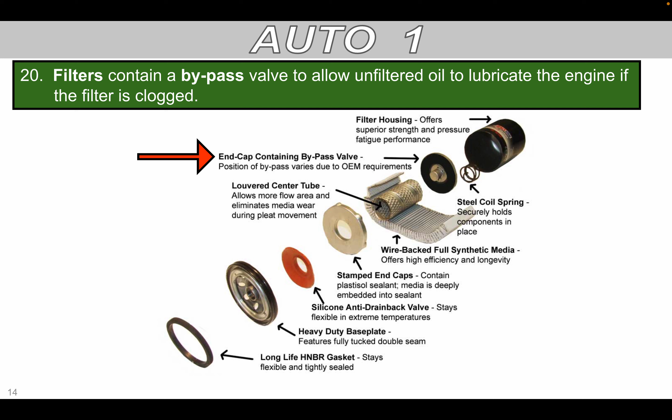So what they might actually end up recommending is bypass surgery. It's the same concept — they're going to go in and take a tube to bypass that area that's clogged up in your arteries so that the blood can more easily flow in your system. My grandfather had quadruple bypass surgery back in the day, and it improved his health because his blood was able to flow better. Same idea with this. So in the event the filter is clogged, this opens up, and unfiltered oil is going to then lubricate our engine. Not ideal, but better than our engine blowing up.

Here again is kind of an image of what this looks like from a cross-section. So here's my oil filter, it's like all in here. Oil's coming in from the oil pump under normal circumstances, and then it's being forced through this paper media. It comes down here, flows down here as well, and forces it over here as well. That paper media is picking up all that dirt and debris, and then it's basically going up and then out into the oil galleries to where then it's circulated throughout the engine. Okay? Real simple concept.

Unfortunately, if this paper media gets too clogged, oil can't get pushed through there. So what ends up happening is down here is my bypass valve. The oil pressure builds up so high that it can actually push on this and open this little button up, and then literally unfiltered oil can go this route out into the engine. So that's kind of fun.

During our oil lab out in the shop, you're going to change oil. Drop the filter, put the filter on, take the oil out, put new oil in. Awesome.

Your group is going to get an old oil filter that we've taken off an actual vehicle that we've changed oil for, like a teacher's car or something. We're actually going to open it up and take it apart. Most people have never done that before. You're going to pull out these elements, pull out the paper filter, pull out the bypass valve and all this sort of stuff and kind of see this. Do we have to put them together? No, we're just pulling it apart and doing kind of an inspection on it.

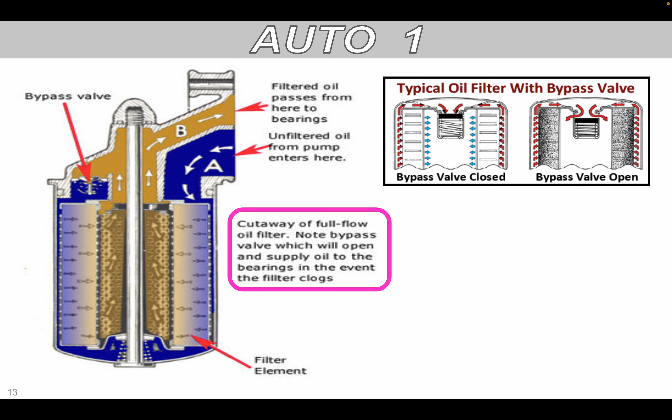What does it mean by swollen? You ever take a balloon and blow up the balloon, you add air to it? What happens to the balloon? It blows up. It's swelling, becoming swollen. So imagine that same concept. I got my oil filter, I'm taking it off for an oil change. I notice that it's kind of blown up a little bit bigger, like a balloon.

Alright, let me get first hour. Okay. Francisco, there we go, thank you. Also, I don't know why you're staring down. Probably because you're on your phone. Alright, we got everybody? I think I got everybody.

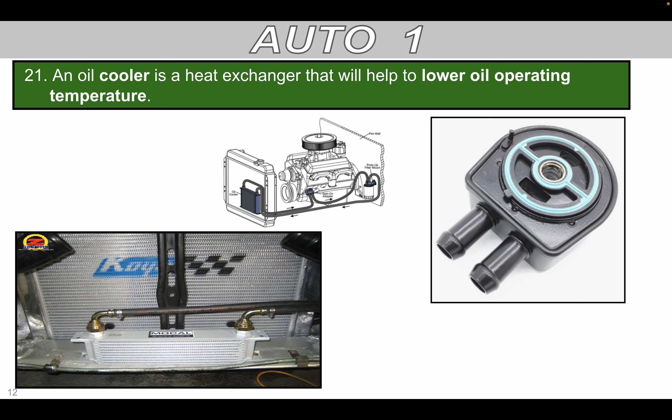No, they're going to be in the same vicinity potentially, just due to the fact that that's where the air is going through. But you theoretically could put this in a different spot, so long as you have an air duct - you still need airflow.

All right, PCV - I want to iterate this because I did talk about this a little bit on Monday. The PCV valve is really linked up with our emission system, but it does interact with our lubrication system, so that's why we're going to at least mention it now, so you have an idea of how it interacts with the lubrication system.

PCV stands for positive crankcase ventilation, and it's named after its function. It does what it says it does: it ventilates the positive pressure that's in our crankcase.

Well, how in the world do we get positive pressure in our crankcase? Here's my air intake. Air is coming in here, it mixes with the air-fuel mixture through fuel injection, it enters into the combustion chamber, it burns. We have piston rings, however, that try to prevent gas blow-by.

But sometimes we're still going to get some gas that goes past the piston and the cylinder wall, especially on older engines. That gas is going to leak into our crankcase, which is this yellow section right here, and it's literally going to pump it up like a tire or a basketball. So it's going to start to have greater pressure than what's out here in the atmosphere.

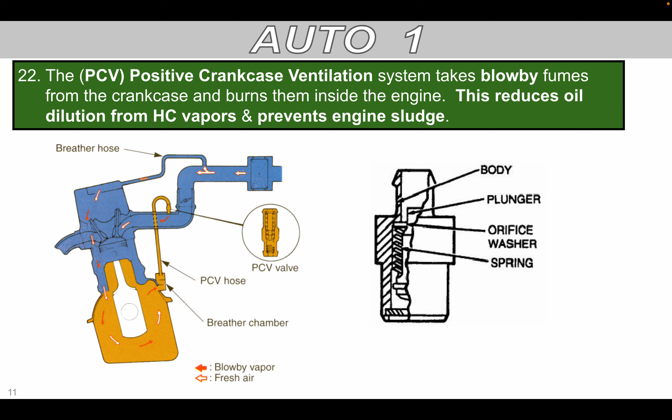Here's another picture of that. This is what a PCV valve might look like on a vehicle, what it might look like on a car. They're really small, about this big. They're super easy to replace, typically, and they're very cheap to replace too, because it's essentially a check valve.

Inside my crankcase, I'm burning fuel, and I'm literally sucking up that extra pressure. It's flowing through this. Here's the incoming air, comes down through here, gets mixed in with that, and then recycled back there - just kind of a process that keeps running around, which is kind of fun.

Again, this is kind of a cross section of that valve. I'm not going to get into that right now.

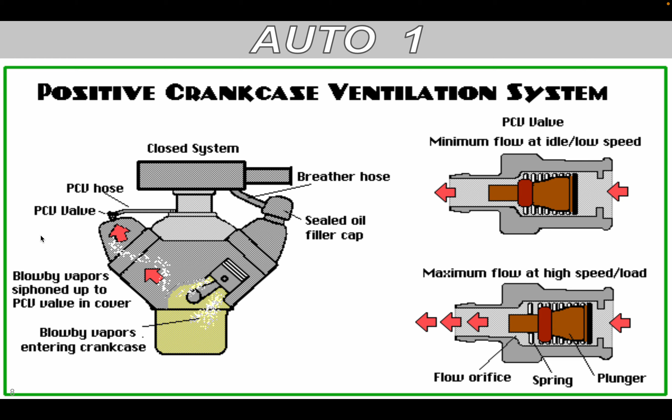What's happening in this case is this particular vehicle's owner was not changing their oil as frequently as they needed to, or properly. Well, what happens again, as that oil is circulating, it's heating up. As you heat the oil up, it breaks that oil down over a period of time - it's not going to be infinite lubricant. So it breaks down.

Now again, we say 3,000 to 5,000 miles, you need to change your oil. This person probably is just like, I'm good, and they let it go 10, 15, 20, 25,000 miles, right? And there's no problem with it. Hey, my car's running fine. Why do I need to change my oil?

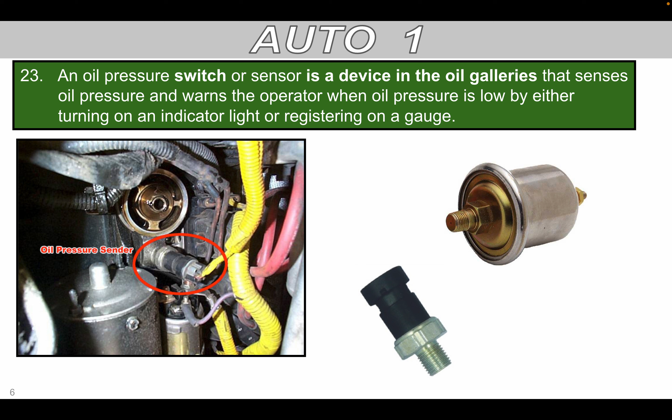Now, there could also be a gauge or something that actually shows you that as well. Now the other option, that probably, at least on newer cars, is more likely. Right here is my oil pressure sender on this particular vehicle. You might have something that looks like this, gives you a needle. More often than not, you're going to see like this light on your dashboard.

That's danger, Will Robinson. Danger, danger. You guys don't know that reference, that's fine. Looks like an oil can, not good. Or if it's really on the low end of the scale, not good either.

Modern day vehicles are getting smarter because that oil pressure sensor is hooked up to your car's computer. That car's computer is programmed to say, if I have low oil pressure, I need to turn that light on to communicate that with the operator. Cool. However, if this is illuminated, or it's triggered through the computer system, it's going to prevent you from starting your car.

You're out in the parking lot, trying to turn the key over, you're like, why is my car not running? What's the first thing you're probably going to think about? Broke. Yeah, it's broke. What's the number one reason why I can't start my car? Battery. Battery's probably dead. Oh, my stupid battery, I knew I needed to get a good one. You go out there, you check the battery. Hey, wait a second, my battery's fully charged. Why is my car not running? Gas. Could be gas, right? You're going to go through the process. Well, I just filled up yesterday. It was running fine. Got a full battery.

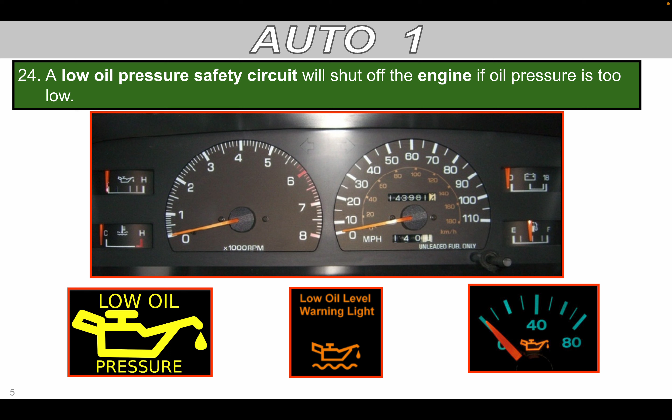So what do you do? Call somebody? Check your oil level. Add more oil. What might happen if you just don't have oil in the backseat?

Time to start walking. What if we come here? Will you give us some oil? Nope, I don't have any oil.

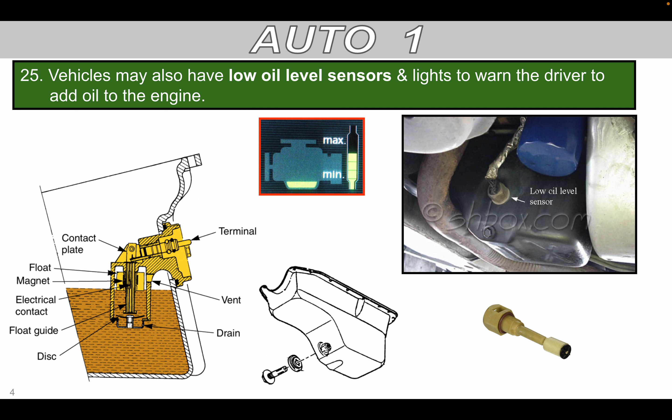Vehicles may also have a low oil level sensor. So not only are we checking the pressure, but we could also potentially have a low oil level sensor. Here's my oil pan, here's my oil filter, and here I've got maybe a particular sensor that's monitoring my oil level. If it notices that level's getting too low, it might trigger similar things—prevent you from turning or starting your vehicle, or it's going to at least show a light, which is always fun.

Again, that's a better picture of that. Not every vehicle has that.

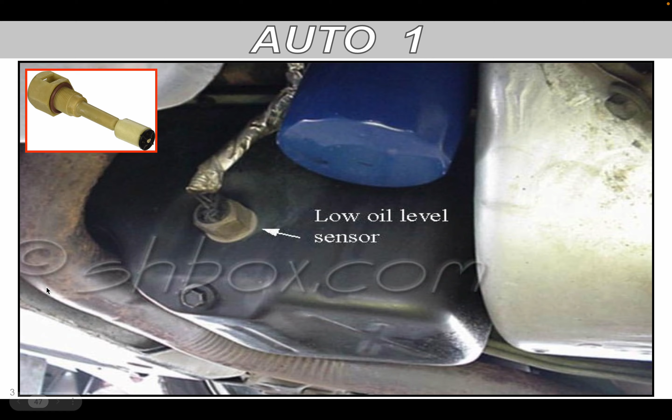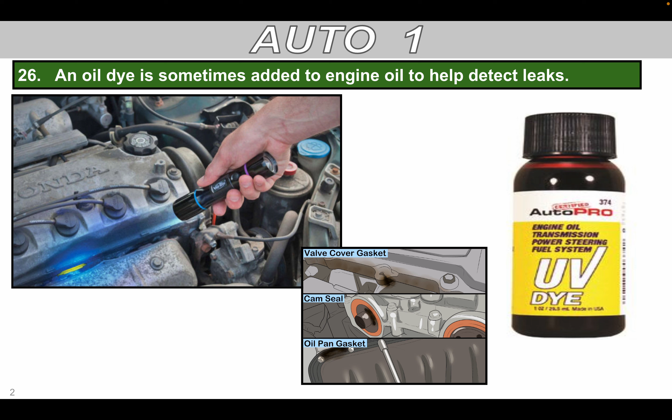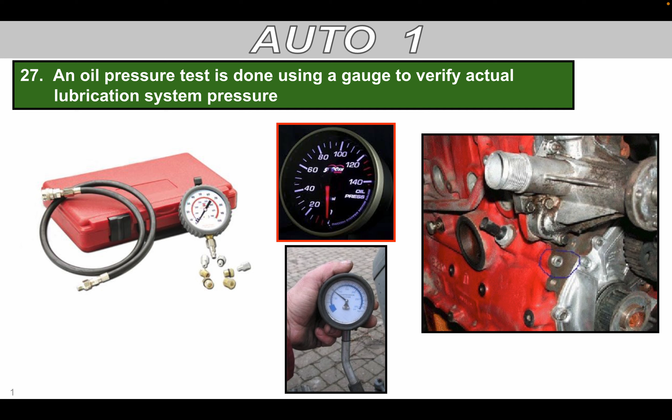Oil pressure test: what we can do is take that oil pressure sensor out, plug in an adapter, and when we run the vehicle, we can actually monitor what it says there instead of running it through the computer. Sometimes that oil pressure sensor could malfunction—this is our way of testing to see if the sensor is actually working properly or if it's lying to us, not too good. So we can do an oil pressure test by plugging a gauge into that same spot on our engine block.